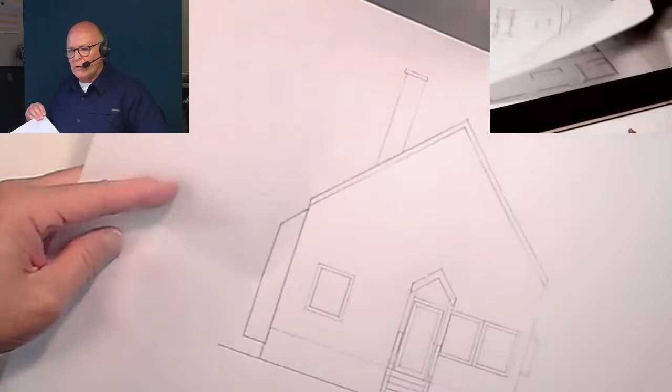Here's the lower portion that cantilevers out. Here's the finished floor. It doesn't necessarily have to be like that, but it was easy to mark. Here's the sill of the solarium. Here's the band and the head of the first set of windows going up to the angle break, which is right here, then tucking back into the building here at that last piece right there. So I've gone ahead and put in the divisions so they'd make a little bit more sense and you can see them a little bit more readily.

Now, our next goal is to put the porch. Now, we're going to do just this porch. Whatever we do here, you can do on this side. It's exactly the same, but only in an opposite hand way. So whatever technique we use on this side, please apply it to this side to complete the drawing.

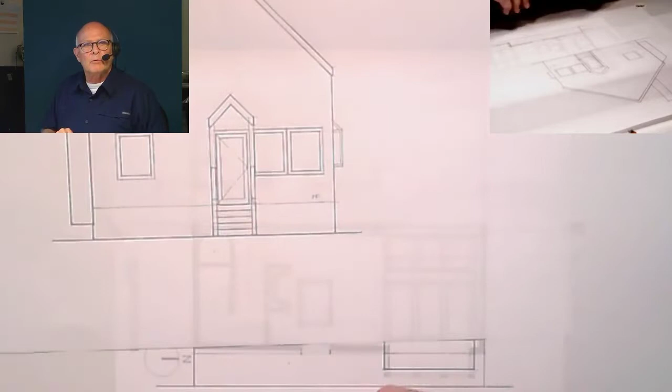Okay, so having said that, the things that we did last time, if you remember, is we found the base, we built the walls, or the posts going up, we found the roof, and we're going to do the same thing here. So we'll be looking at the fact that our drawing is going to grow a little bit this way. How far? You see it right there. All that dimension out there is provided. It looks like my copy got a little bit trimmed. So we'll fix that.

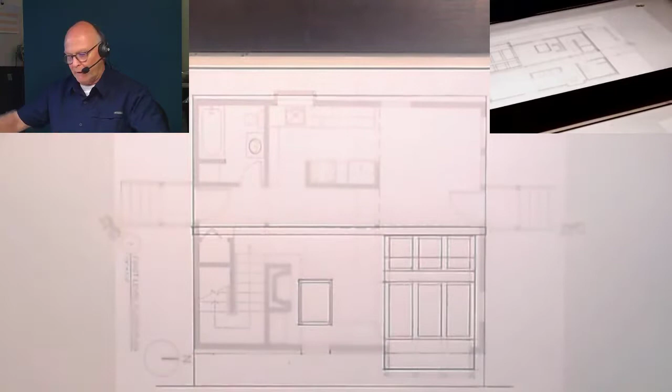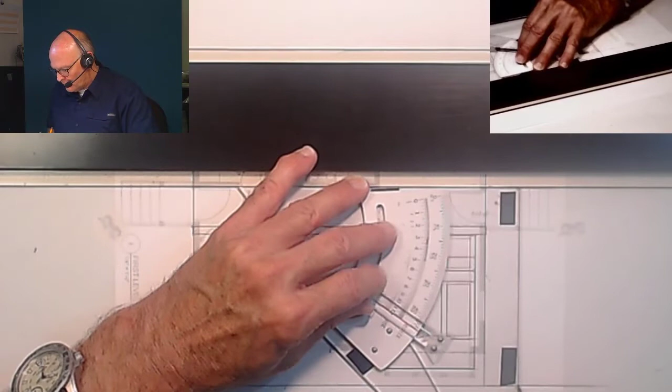But let's start with the porch base. And the porch base is right there. That's how far out it goes. So we can project a line down lightly. So first thing I'm going to do is extend my baseline out just a little bit. You'll do the same over here later. Okay, so with that, I now know that my porch height is no different than it was in the first elevation, and so it lines up with the finished floor. The finished floor runs across here and becomes the porch height outside. So there's my profile of the porch right there.

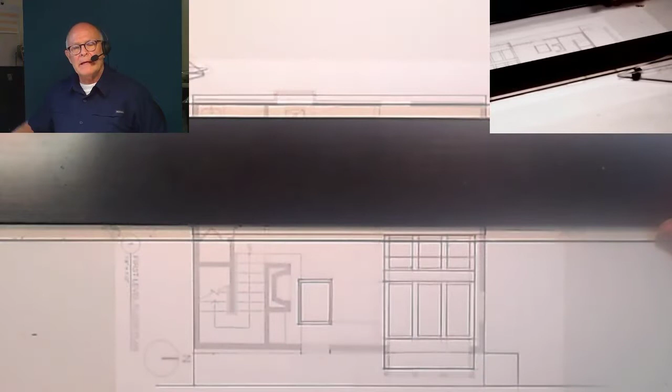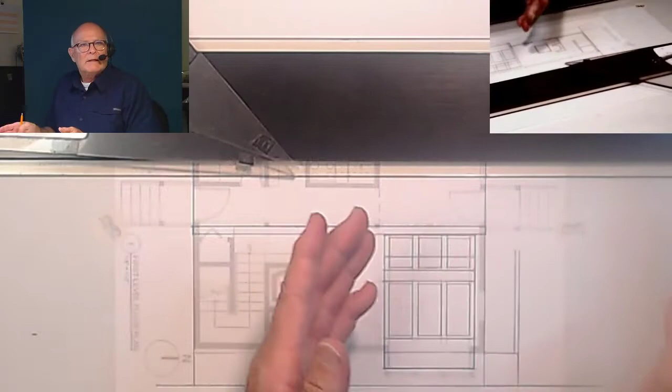Now we're going to go ahead and build the porch posts into place. Well, there they are. Now, we're not going to see the back one because the first one's in front of it. But we can extend this line up to some point. Now, we don't know exactly how high, but we know the width because remember, we're using the plan to find the width and the placement of the element. So basically, we just lined it up and shot a line down.

Now, if we remember from the previous video, we mentioned the top of the eave right here is at 8 feet. So I'm going to go ahead and mark that. Before I do that, I need to put a little bit more of a point on this thing. Okay. So now that I've got that, we'll go ahead and mark that at 8 feet as the top of the eave.

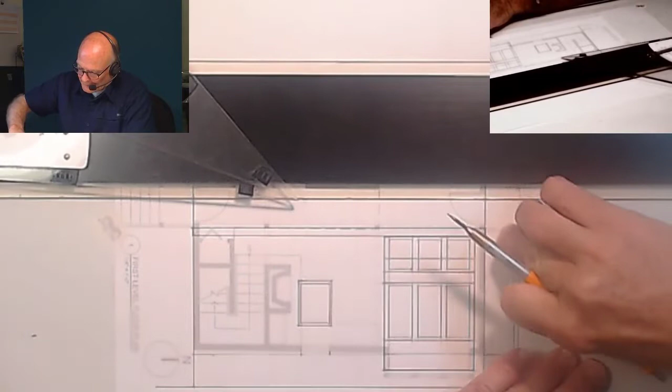So there we go. And we know that the eave itself was 8 inches high from the previous elevation we did. And so I can bring my post down a little bit now because it doesn't go that high. Okay, so we now know where the bottom part of the porch roof is. How high is it to the other? Well, we could do some geometry and all that. We're not going to do that. We're just going to measure it from this drawing.

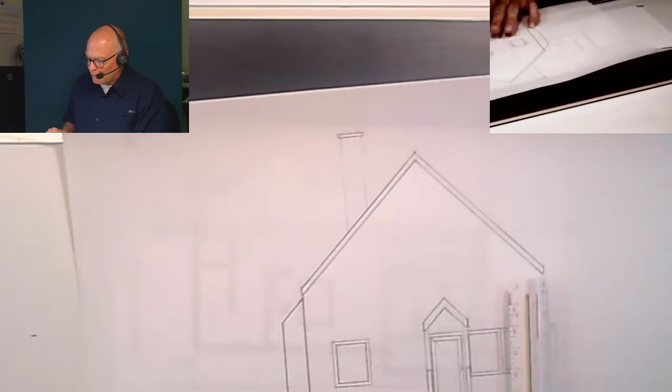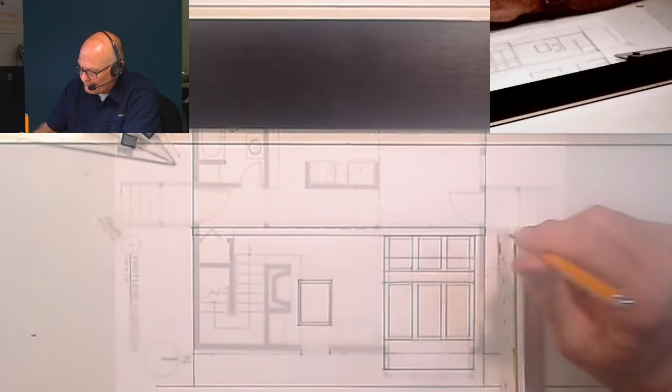So remember, finished floor, we're going to use the finished floor. So I measured that. It looks like it's about 10 foot 3. So that's what I'm going to measure. Double check, just make sure, 10 foot, 3 inches, we're good to go. So coming over here, 10 foot, 3 inches, goes to about right there. And that takes us at the right location. So that becomes our horizontal line of our ridge.

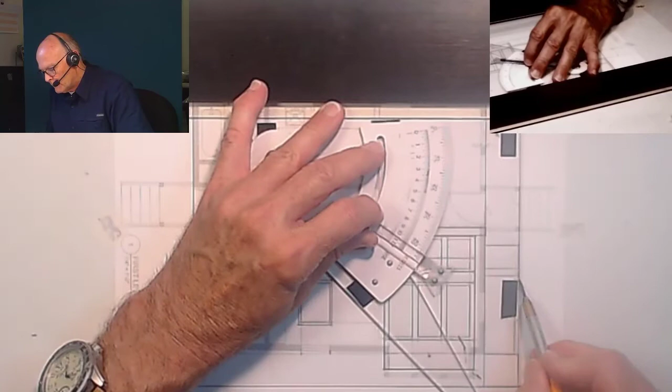So what we have is we have the roof of the porch in profile or in side elevation view. It looks something like this. I'll go ahead and provide that. All right, so got the base, got the posts, got the roof. Got the base by aligning it here, measuring it up to the finished floor line. That gave me the height.

Took the posts directly out the plan, projected them up to a point where I could use the information off this elevation or as measured off here. Doesn't really matter, either works. So 8 foot was to here, came down 8 inches, and then I measured this height from the finished floor. We got that height by using other information. So that's our porch. Still not quite done. We have to provide the steps.

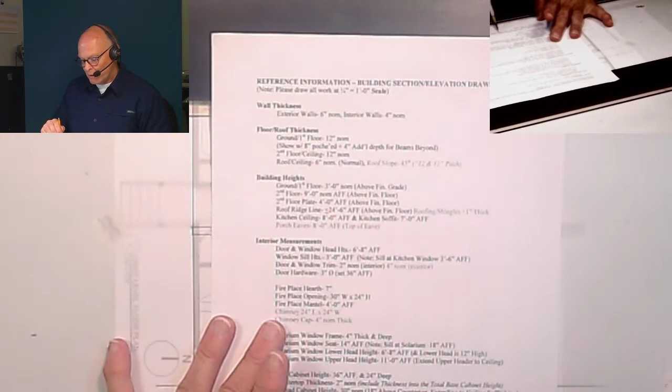So just like last time, we were able to use the information from the sheet here that said each riser is 7 high and each tread is 11 deep. Well, we couldn't see the depth because of our view orientation previously. We'll see it now. So we're going to create a little bit of a grid, and you'll see how this works. It's perhaps the simplest way. We're just going to connect some dots.

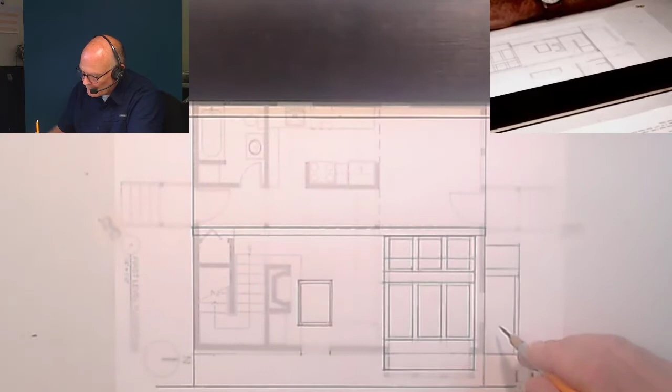So first thing I'm going to do is I'm going to measure 7 inches and put a point. And I'm going to do it again until I need 5 of these measurements. And I got one more. Okay. As I mentioned, we're going to have 1 inch extra, but at this point, don't worry about it. So I'm just going to draw a light horizontal line out. Now, we really don't have to count the top piece because this edge is the first step down, and that's the edge of the porch. So we already measured the 7. Now we're going to do the 11.

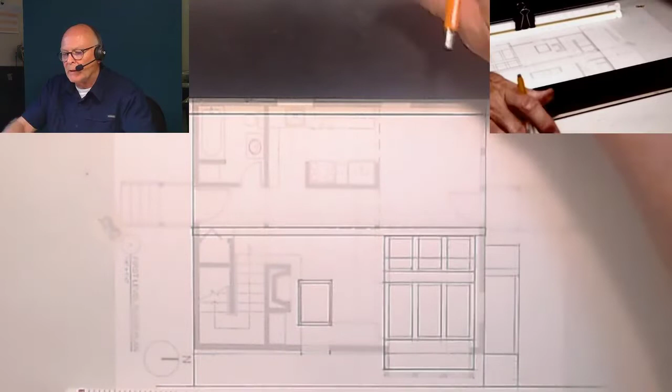So we come to the bottom here, and we just mark each one 11 inches, which is just a hair short of a foot. We do each one. That's why we need a little bit sharper pencil at this point, because precision will show its head here. So we need how many steps down? Well, let's count them. We need 1, 2, 3, 4. Okay, so I've got 1, 2, 3, 4. I'm done. Now, if you remember, I lost my copy here. I could project this up and I could say, hey, look, that's where that is. So it works both ways.

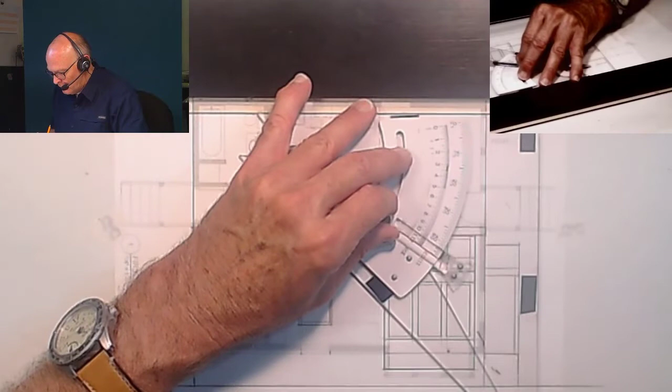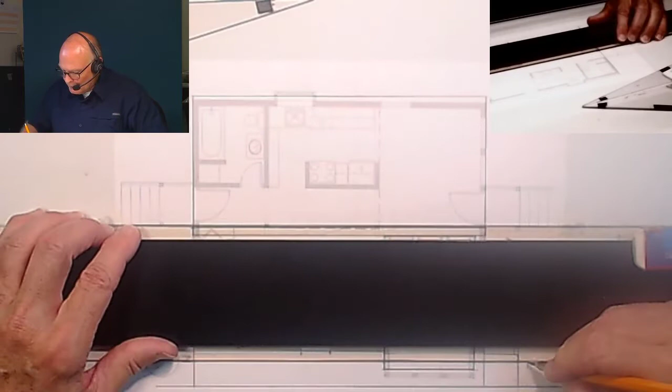All right, so now I'm going to do a quick light line of all those tick marks and verticals. You can't see it because it's very, very light, but you'll see me now draw it in. So I have a grid of 7 inches going this way and 11 inches going this way. So I'm going to start at the top and I'm going to go out 11. I'm just following the grid. Down 7, out 11, following the grid, down. A little sloppy there, but that's okay.

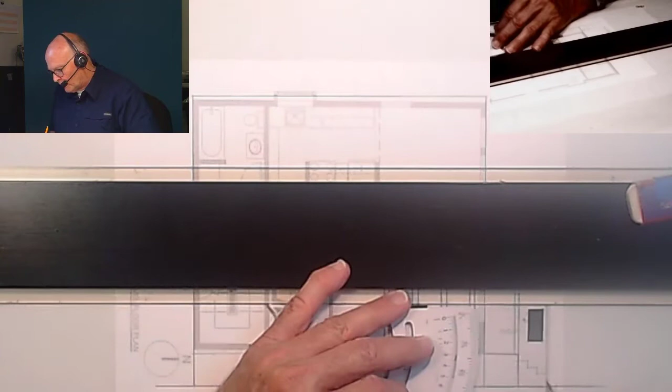So rough. Okay, and then down 7, out 11, down 7, out 11, and the last one hits the ground, and we're done. Now, hopefully you can see that profile. 7, 7, 7, 7, 7 along this way, 11, 11, 11, 11 this way. All I did was just connect the dots along that grid, and that gave me that profile. So remember, 7 down, 11 horizontally, and that should get you there. All right, so that's the profile of the stair, simply placed. We could do a lot more detail, but we don't need to at this scale.

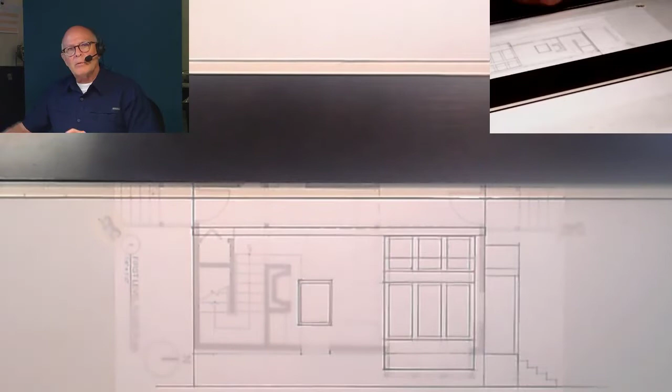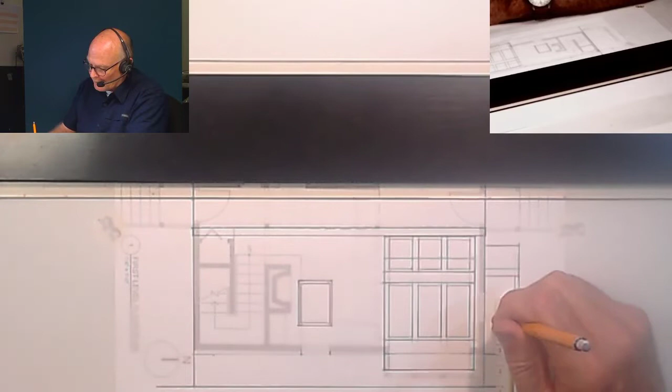So next what we want to do is put the railings in. We did the railings here and they were pretty easy to find because they were just some horizontal dimensions. They get a little bit more tricky here. Okay, so let's start with the top. We know from our previous dimensions that this height is 42 inches or 3 foot 6 inches. So measuring from the finished floor, 3 foot and 6 inches. That's the top of the railing right there.

Okay, and I'm going to mark the other side of the post here because that's going to be the beginning part of the railing coming down. All right, so that right there is the top of the railing, and these railings are 2 inches thick. That's going to be challenging.

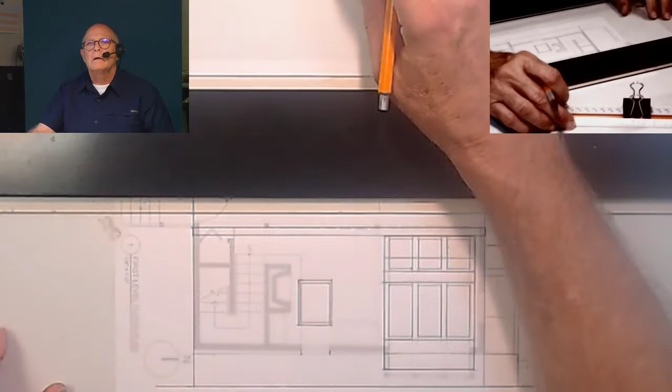So one of the things I'm going to tell you now is that there's a little bit of a shortcut. Code says that we're not supposed to be able to have a space bigger than 4 inches because little kids get their heads stuck in it and then everybody gets excited. So as a result, the maximum opening cannot be bigger than 4 inches. You can't pass a 4-inch sphere through that railing. That's the ticket. But it's really hard to measure 2, 4, 2, 4, 2, 4.

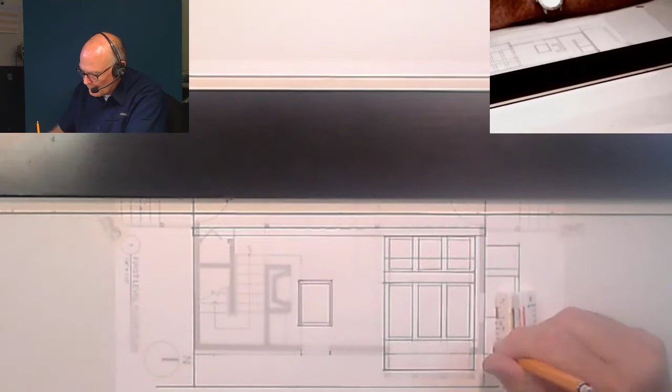So you can see my trick here as I do this. And then we're going to do something similar on the next railing. So the first thing I'm going to do is I'm just going to mark them 6 inches apart, because it's pretty easy to mark. Just come over. That one's a little bad there. I'm going to fix that one, make it a little better. There, there, and there. Okay, now I'm just going to put a horizontal line just where each one of those was. And as I do that, I'm giving the respective top of each rail.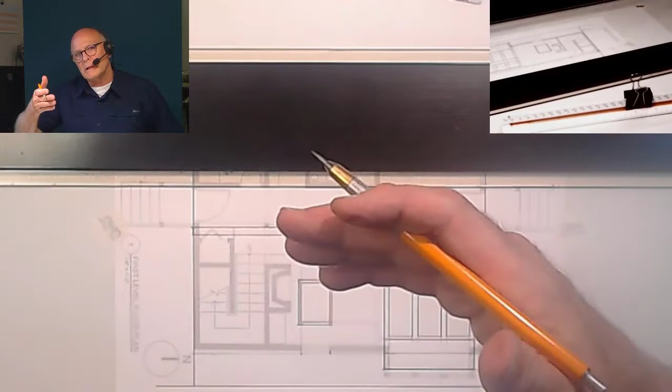There we go. Now, it's kind of hard to see what's what, but you'll see it as I draw this in. Now, I'm just going to come down 2 inches from each one rather than going 2, 4, 2, 4, 2, 4. I just need to come down 2 below each of those horizontal lines. And you say, well, that's kind of hard. You'll be okay. Just take a shot at it and you'll be fine. So I'm going to do that here.

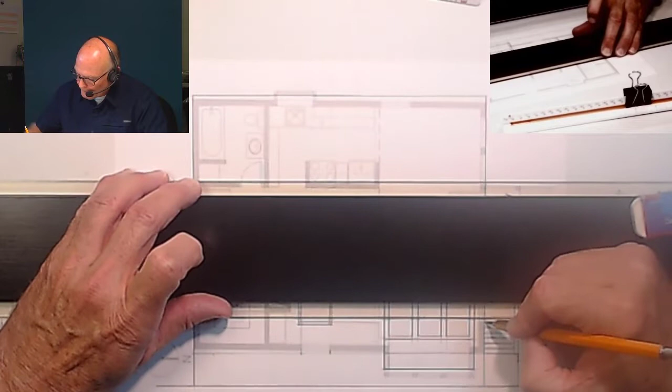I'm going to pretty much eyeball it because I've been drawing for a while and I kind of know about where 2 inches is, and it's a rough out. I'm not necessarily doing my final. So if it's a little bit off, I'll fix it on the final. That one's a little hair fat, but this one's okay. Okay, and the last one. There we go. They look pretty good. I could show you them in more detail, but I don't need to do that. All right, so I've got the top railings done.

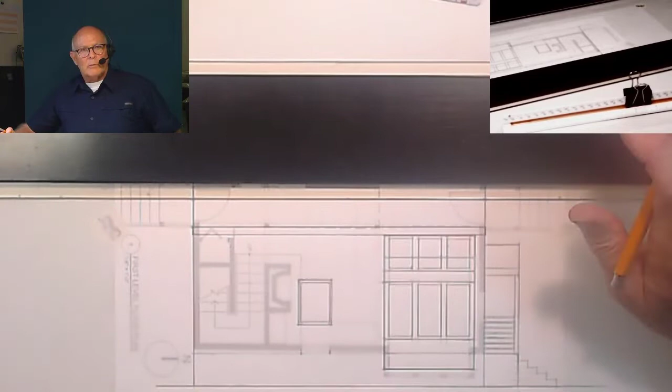Now I got to do all the stair ones. So let's start with a quick note. Even though it's not showing it quite right on this, generally speaking, we want to go one extra tread out to make things work for railings. So I'm going to add in one more 11-inch out here. And I'm going to mark that. I'm going to bring a line up.

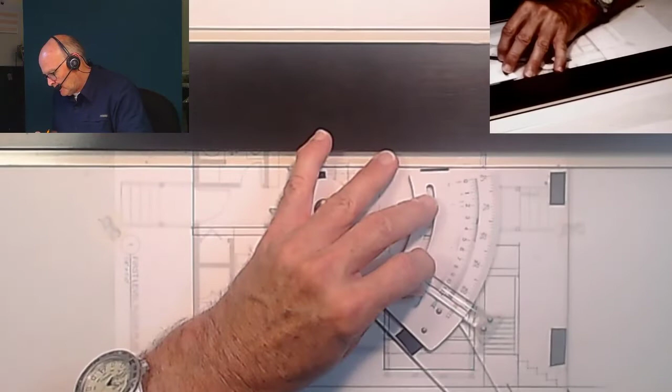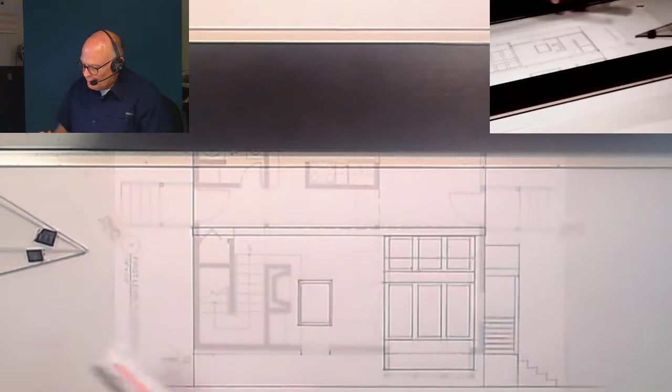Now, as I remember, I moved a mark over to here, and so if I measure from this point down to here, it should be 42 inches, and indeed it is. It's 3 foot 6. All right, so I need to do the same thing here, 3 foot 6 out. So you'll see what happens. There's a way of checking this, but this is the best way to do it: measure out the 11, draw a vertical line, and measure up the 42 inches. Now, I'm going to do one other trick, another test. This way, you'll know if things are correct.

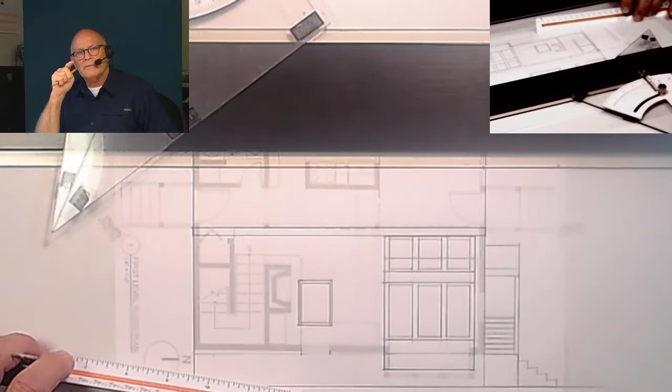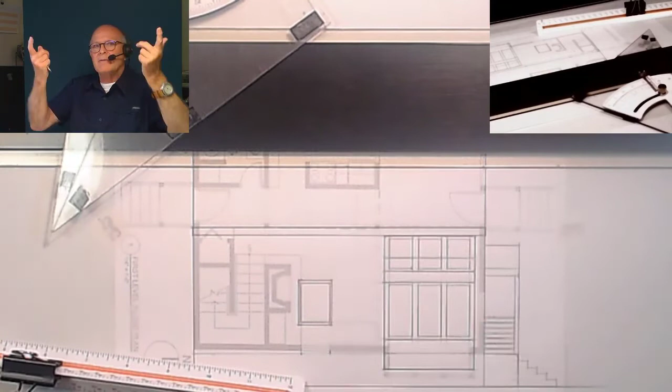The measurement of each of these rail heights occurs at the nosing. That's that point where the vertical and the horizontal come together. That's called the nosing. So that nosing point, there, all have to be 42 inches. That railing must come off that point. No deviation, it's got to be consistent, 42 inches. The reason is people who are not paying attention, they start to stumble, they need to grab the railing, and it can't be, oh, I need to grab it low or high. It needs to be at the same height consistently throughout the design of the stair.

So we've said 42 works for a guardrail and a handrail. That's what we're going to use at this point too. So 42 inches, I'm just going to measure off one of the intermediates just to test ourselves. There's 3 and 6 right there. Now, I just put a dot there. I'm not going to draw any verticals yet. Here's what I want you to understand. I'm using my adjustable here because I can, and it works.

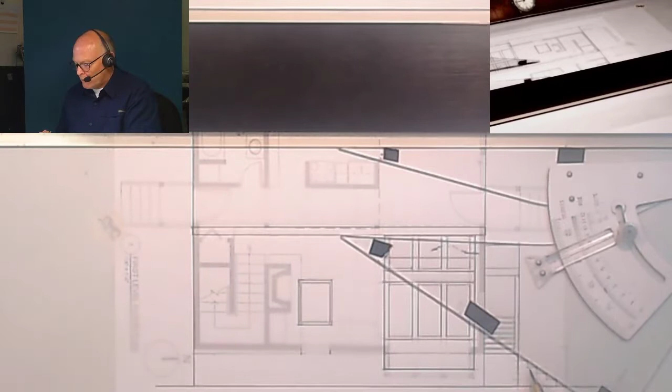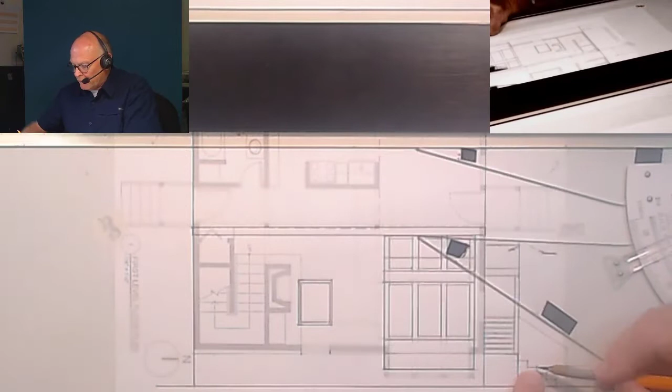And what I wanted you to see is, if you look closely, you'll see that my adjustable triangle hits every nosing precisely at that point, and then out here at that one leg point that comes out. So let's go up to the top and test. Right there is my top, and right there's my top. They all line up. So what I'm getting at is that this height, by testing it off this point, it's also the same height there also.

So anywhere you want to measure it, it works. Just keep the consistency of the slope. Set 42 here, set 42 here, shoot a line, they'll all work. Okay, now I used my adjustable to prove my point. You don't need to do that. Just set the point at 42 here, set the 42 point out here at the 11 inches out at that post, and you'll be good.

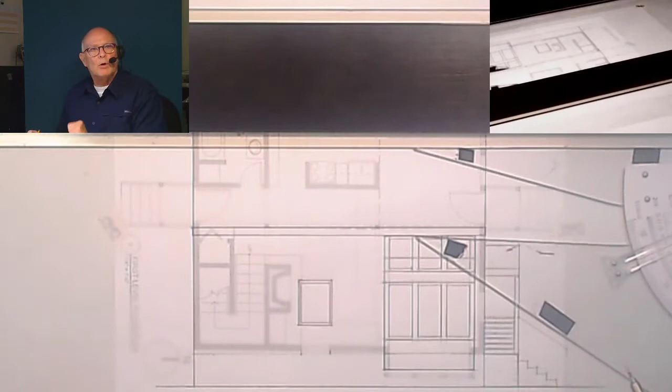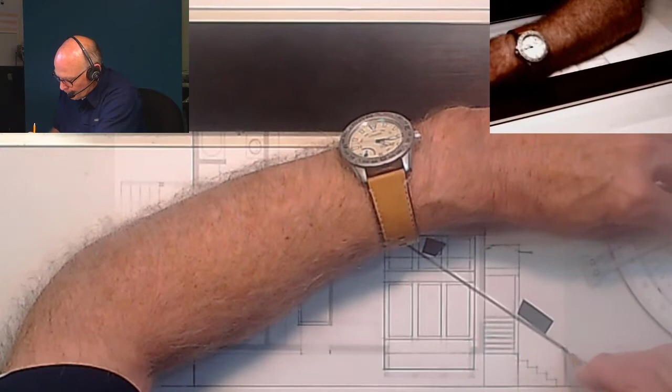All right, so what I'm going to do now is I'm going to go ahead and add some thickness into this thing, which is that 2-inch thickness that we talked about previously for the guardrail. Okay, there it is. Are we done? No, remember the 4-inch ball? We can't pass that through there. How are we going to do that, Secor?

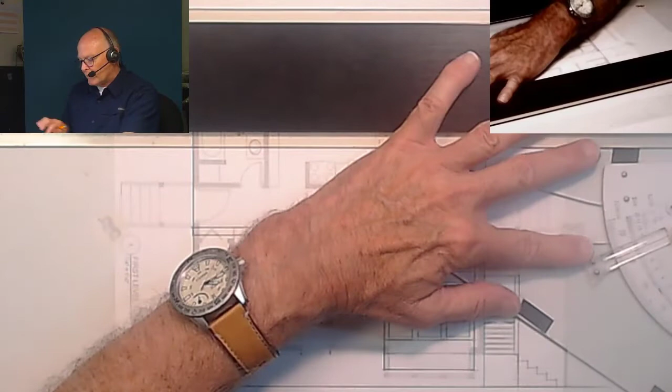Okay, so we're going to measure perpendicular to that slope. That means 90 degrees to it. So if you're not certain how to do that, lay one triangle this way and get it set. Then bring your other triangle in at a 90 and measure off. You want to be perpendicular to that. Those measurements get weird, very weird, if you try to measure them vertically. That's not correct. You have to be perpendicular to the slope. Okay, so there we are.

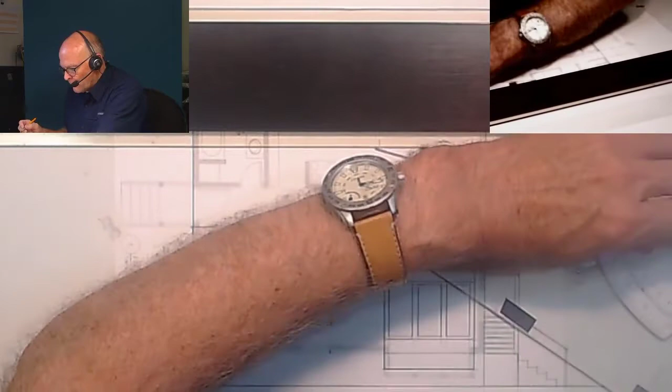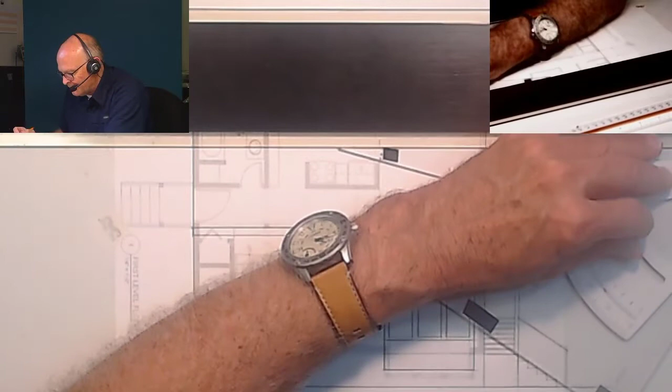That's good. Okay, now I'm going to just draw a single line from one of the points. Doesn't really matter. Now I'm going to do my 6-inch trick again. I'm going to start it. It has to line with the top. So here we go. 1, 2, 3, 4, 5. That's it. We can't do 6 because it interferes with the stair. Yeah, I guess we could. I'll try it. I don't think it's going to work, but we're going to try it anyway. Okay. It's kind of close.

All right. So I'm going to shoot my lines. Here they go. There's 1. Here's 2. 3. And isn't this precise? Isn't it crazy how tight we have to be with this? And we do. Okay. Now, the last one comes right there. Theoretically, little Johnny could get his head caught right there. I don't know what we're going to do about that. We would figure something out in our design. But for all intents and purposes, we're okay.

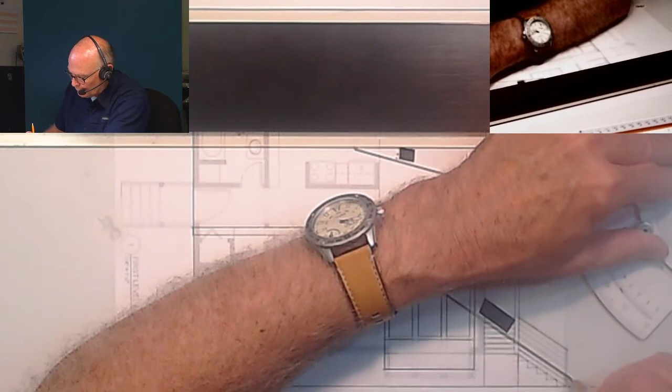I'm going to go ahead and shoot in some lines here. And we'll see how close we come. But I want you to know that at this scale, it's not critical that you be perfectly to scale. If you show a line that instead of 2 inches is 1.5 inches, okay, just understand we're trying for as best we can with the pencil and so on. Computers do a little better job. Okay, so there's our stair railing. You can see we've got a top rail, and then we got the intermediate rungs horizontally placed. And they line up with what's going on here too.

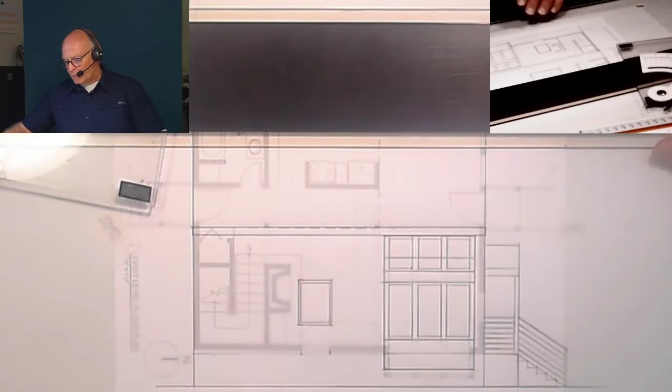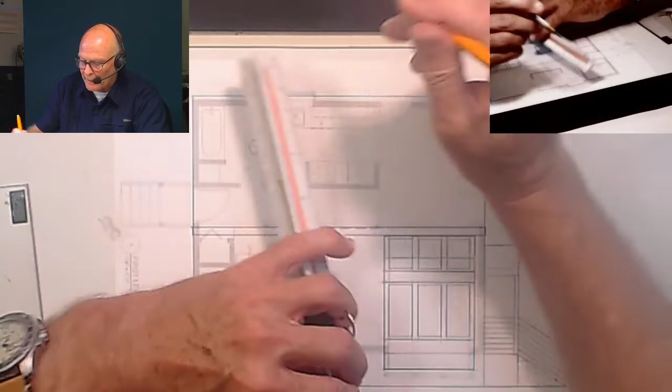Okay, so last bit we have to do is our chimney. Our chimney, we know the height because the height is 2 feet above the ridge with a little 4-inch cap. So it's up here somewhere, so I'm just going to mark 2 feet above the ridge. We'll find out where in a minute. Plus a 4-inch cap. Now I just drew that in lightly because I know my target. Where is the fireplace and where does it line up? Okay, well, if you're thinking about the last assignment, it needs to line up over the fireplace. You don't want the smoke wandering around. It needs to go straight up and out.

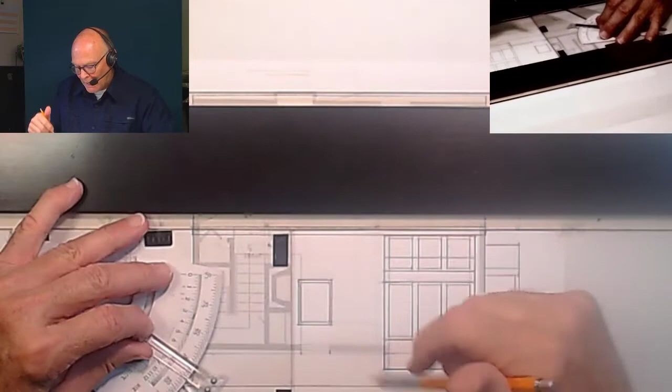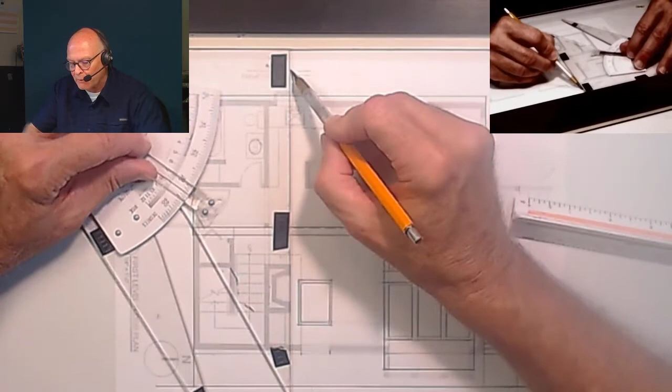Okay, see the fireplace right there? There it is. So I don't need to do the full box. I just need to know that it's a 2x2 and that it lines up flush across the face. So we're 2 feet at this point right here, and we extend it up. So I lined it up at the face, and I'm at 2 feet, and I'm just going to project it up until it hits that cap and top of chimney up at the top. Okay, so that's good. We've anchored that. We've got that figured out. We'll go ahead and erase part of that roof there. Where does it intersect the roof here? It's right here.

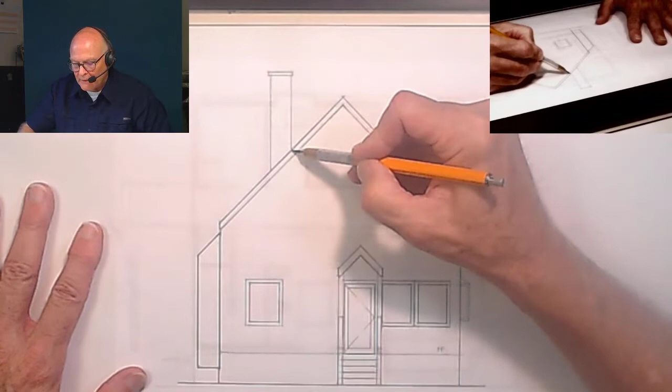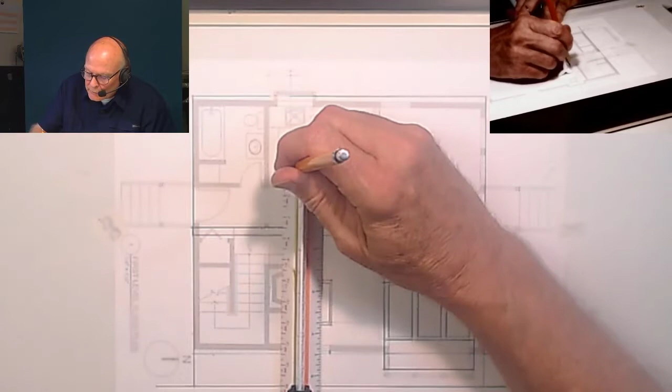So there we are. Ooh, that lines up. That lines up. That means that point has to line up and that point line. So all I need is a horizontal line. I don't need it here because I'm looking this way. I don't see it. I do see it right there. So you can say, well, how high is that? Well, we can measure it from the finished floor. Looks like it's about 17 feet. I'm going to say 17'4". And that should be good enough. So I'm going to measure 17 feet 4 inches right there.

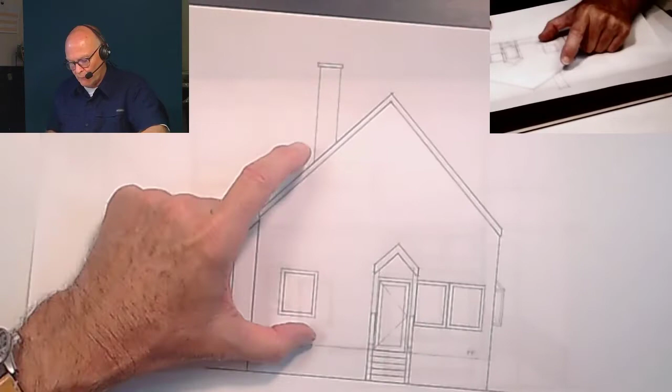Come across. So I lined it up with the plan, just like before, shot it up, and I used the other drawing to get my heights. Got that height off the ridge, and then I just got that height by just measuring it from the finished floor right there. Okay, so now I'm going to complete that. Add a little bit of meat on the end of the cap so it has a little bit more prominence.

Okay, we're getting pretty darn close here. Again, you're going to put the other end of the porch on in a symmetric way. Just going to flip it this way. Everything's the same measurements, just opposite hand. Okay, so you can see what it looks like on this side. You can see what we have.

Now, this is one of the things that we talked about at the very outset and in the preview, is that what you've been drawing here is just forms. There's no interest to it. There's no life to it. So as a designer, our goals are to make things make sense. What are the opportunities for design? What kind of materials can we use here to enhance this thing? So as we start to think about it, there's a little bit of, I'll call it, special considerations you need to have. And this is what designers do. They think about these things, and I want you to do the same thing. So I've got a couple thoughts here that I wanted to share.

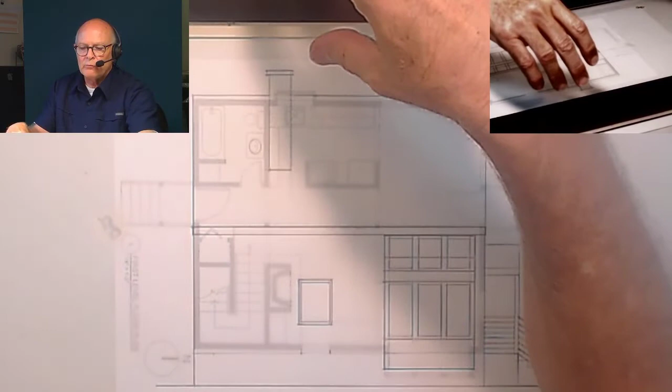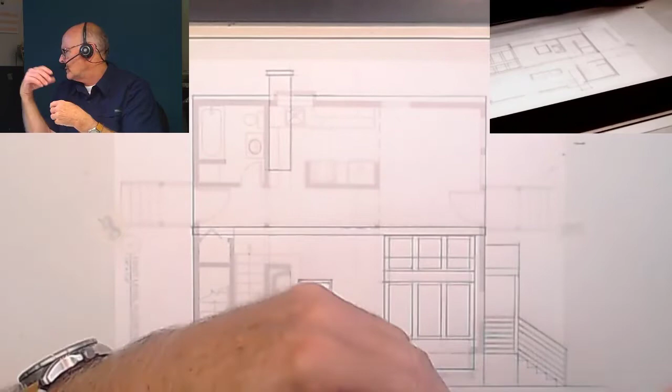One of the things that we want to do is we need to pay attention. I'm looking at my notes. I apologize. Okay, we need to think as much about where things go as possible. We need to think what makes sense, what is logical. And my suggestion is look at the world around you. Again, there's things that are happening inside your house, how your cabinets are set, how your doors work, where your windows are. All those things are already around you.

As you're driving down the street or riding your bike someplace, take a look at the buildings on your street, or maybe down the block or in the neighborhood somewhere, and look what's interesting. What materials do you think are successful? What design works well for that building? Nothing new under the sun. I think I said that previously. And so understand that designers are analyzing things all the time. They're looking at, I wouldn't do that. I would do that. That makes sense. And we're collecting those into a database in our head. And we're thinking about them all the time.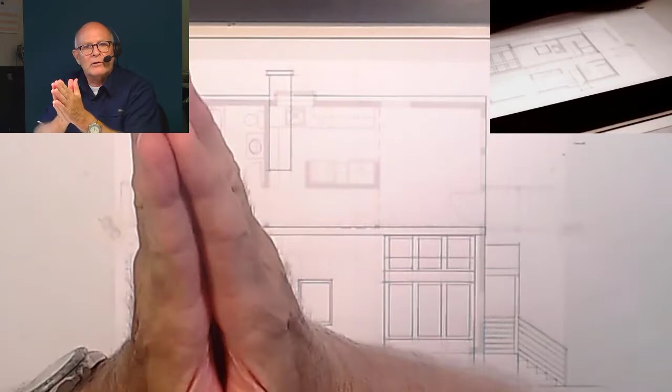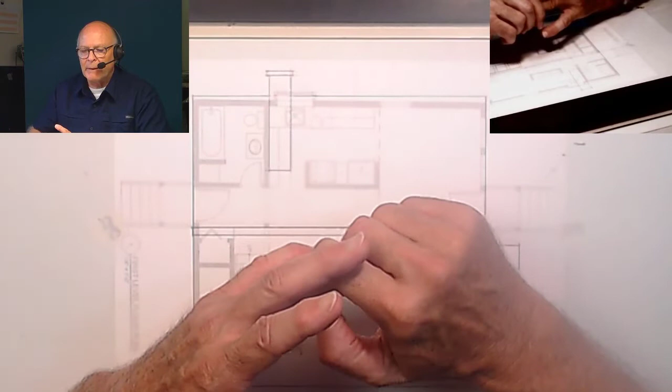And so as a designer and an interior designer, the rules are exactly the same. Whether you're doing an interior space or an outside facade, you have to be thinking about what is going to enhance the design of this object or this space or this building. So how do we really do that? Again, we're going to look at things, we're going to analyze them. What I'd like you to do is to start thinking about the specific characteristics of materials.

Bricks aren't this big, they're this big. They were designed so a guy could pick one up, put mortar on it and set it in place. Now, are there concrete blocks? Yes, there are. But they're not this big. They're this big, and they're pretty heavy. The guy picks it up, and he butters the mortar on it, and he sets it in place. He does the next one. He does the next one. All of these are a certain size for a certain reason.

So you can't make that stuff up. If you make it up, people look at it and go, that don't look right. That person doesn't know what they're doing. So start building your own database of what things are and how big they are. If you're not certain, get a tape measure and measure it.

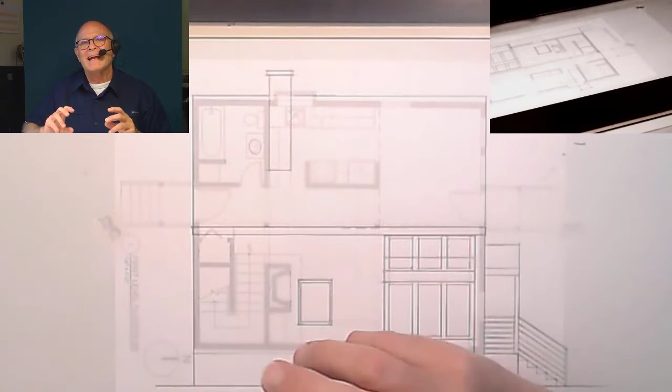It's okay. It's all part of the learning process. So not only are you looking around and seeing stuff, but you're paying attention to the stuff that needs to be registered in your mind as a menu of materials that you can use forever.

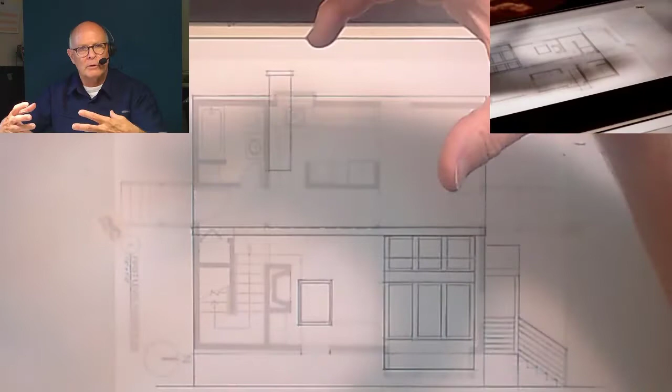So as you start to do that, it's important then to think about where they occur in the building. Do you put heavy stuff on the top or do you put it on the base? Well, generally speaking, things that are heavy in nature intuitively want to be lower because they anchor the object better to the base. Okay. Now, if you're a really good designer, super good designer, you can tweak those rules.

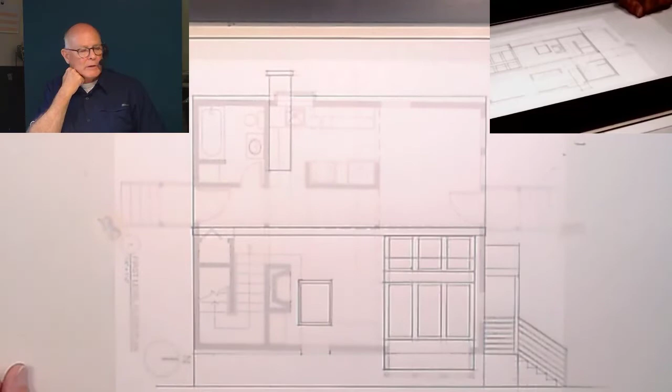It takes a long time to get to that point. So before you start experimenting, know the patterns, know what things work best and for what locations. Okay? So then the last thing we're going to do is we're going to start talking about what works.

All right, so we've seen this elevation before. And actually, look, it's very similar to the one I drew today. But I'm giving you this so that you can see, I simplified some of the line work here a little bit. But it's pretty boring. If you take some tissue trace paper, you can start to see what things look like.

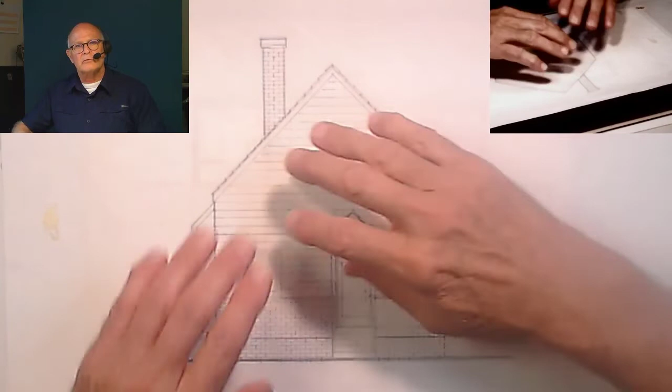You can start to see, oh, okay, this is clapboard siding. This is horizontal wood siding. And here's what the shingles look like. And here's what the bricks look like when we do a brick fireplace. And here's what the same bricks look like when they're down low. You need to start building your elevations with the characteristics you want to see.

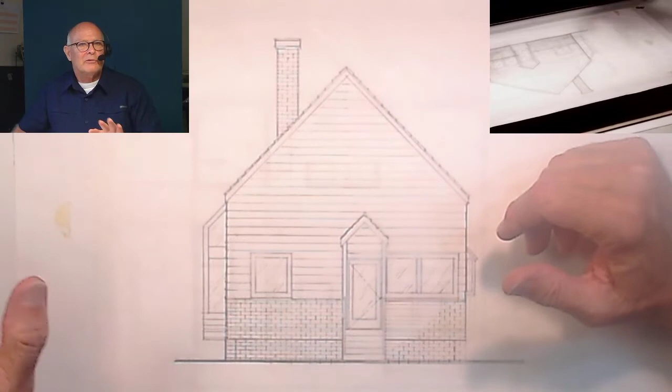Understand something. In my class, you don't get a lot of options for providing design. I'm sorry. You'll see a few in the future, but understand this. This is part of the learning process. It's thinking about how you apply materials to different designs.

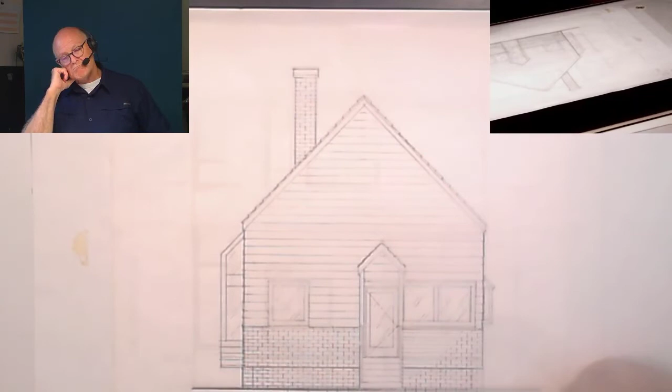And so in this, I wanted you to see that I was able to experiment by laying some tissue paper down on top and lightly drawing it out and testing it. I like it or I don't. Do another one. Oh, I want to do fieldstone. I want to do organic stone, river rock.

Okay. How big is a river rock? It's not this big. It's about this big. The reason is the guy who has to put it on there, he can only carry so much. So he needs a block or a rock that's only so big. Think about those things. It's an organic way that people have been building for a long time. And so the materials relate to that. And I hope that you start to see that and understand that a little bit more.

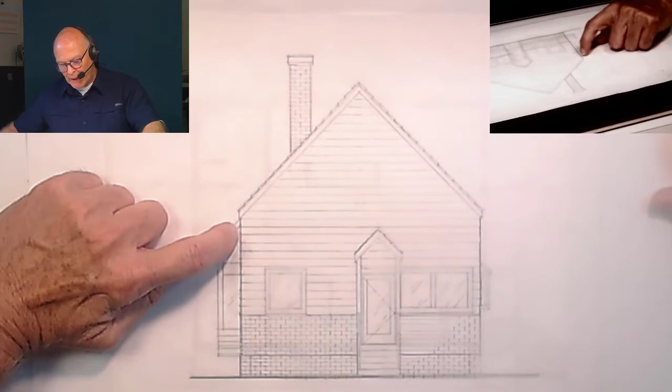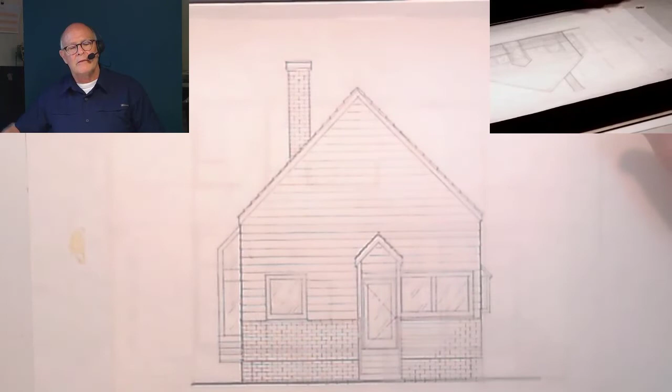But I wanted you to also see that I was able to apply a little bit of texture to add some emphasis to this. I did put some marks on the glass so it shows off as a little bit more glass. But I want you to experiment. So this assignment includes applying finishes to the facade, so you can describe it with a little bit more character. So I'm not going to draw these up, and I'm going to let you do that. But you see, you've got all the parts and pieces you need to complete the assignment.

I really think this is one of those fun ones that people have a good time with because they can start to experiment with their own design feelings about how things should look and how things should be. So as we close this assignment demonstration, I want you to keep in mind that there's some experimentation on your part that you need to do as you complete these assignments.

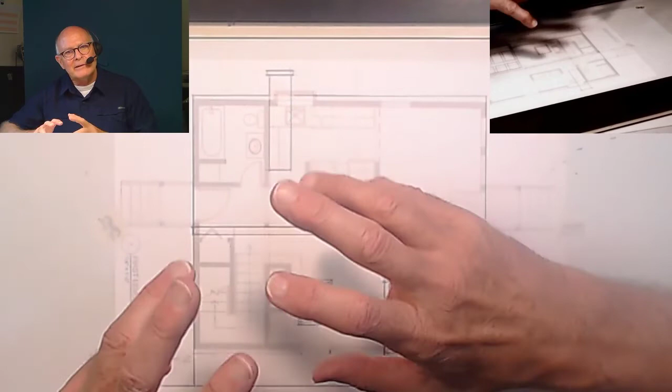I want you to complete them with good quality line control, line quality, and line weights. Remember, the profile of this building should punch off the sheet. And the interior lines, maybe not so much. So, the heavier the material, maybe the heavier the line weight. So think about those things as you're working on it and do your best on these final drawings because they are your work. You should be proud of them.